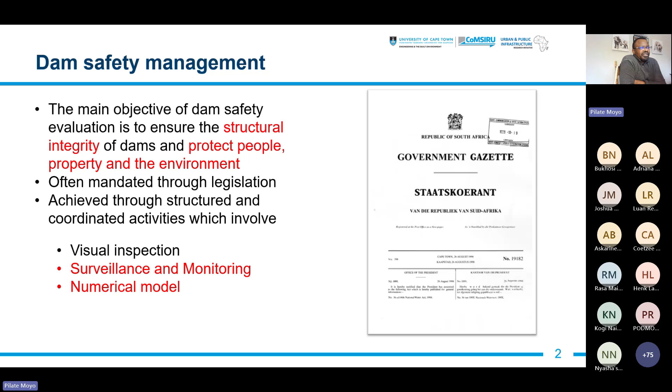But I'll focus more on the technical side this afternoon of dam safety evaluations, which really take three main activities: visual inspection, surveillance and monitoring, and numerical modeling. Through these activities, the intention is to gain as much information in order to make decisions about the condition of the dam or a reservoir. And once we get that state of health of the dam, then we can obviously make a decision as to what is the next step.

The best case scenario would be, after doing your visual inspections and after looking at your monitoring data and your model, to have a perfect match between what you have modeled or assessed and the actual structure. And of course, we know this is not possible. There's always going to be a misalignment, and the essence is to minimize that misalignment as much as possible as one goes through the assessment phase of a dam.

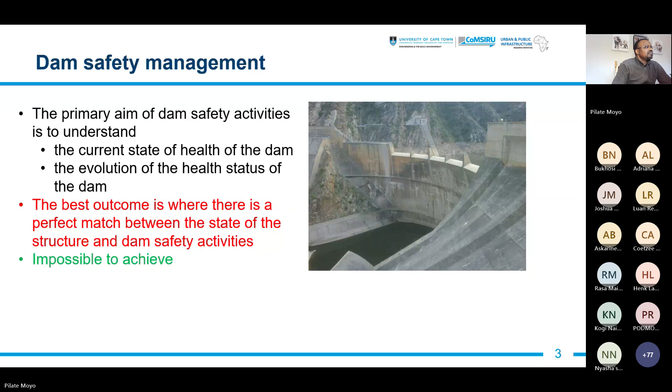One of the biggest challenges with dams is the many issues that interact around these structures. We know dams are very complex structures. They present challenges throughout the activities of dam safety evaluation, from inspections to numerical modeling. There are significant challenges, most of which arise from the complex geometry of the structures. We can design them as symmetrical, but they will never be perfectly symmetrical. The foundations will often offer challenges, as will the dam wall itself and the environment in which the structure is placed. As engineers, we have to put all of these together to come up with a meaningful solution or interpretation of what is going on with the structure.

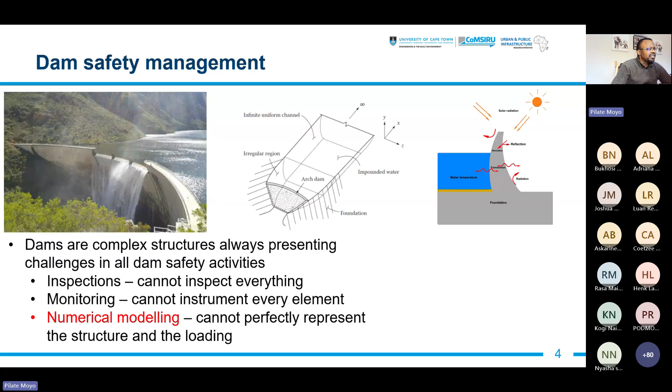Noting that misalignment will lead to difficult or inaccurate decisions. If I was to inspect a dam, it's unlikely that I will see everything on that dam. Neither can I monitor every piece of that dam, nor can the numerical model that I create be a perfect match to the dam. So my intention as a dam safety evaluator would be to minimize the difference between what is in my head from my inspections, what I see from the data coming out of the instruments, and what I see in my model. I try to minimize that and bring it as close as possible to the actual structural system, or to the actual structure as it stands.

So I want to focus quite a bit on the numerical modeling, because this is where ambient vibration testing plays a role. We'll look at the process of modeling and what the key limiting factors are.

I'm showing this picture, which you'll see quite a bit of today - one of the dams in the Western Cape. Given a dam like this, with the intention of assessing and evaluating its condition numerically, one wants to create a model, whether it's a finite element model or a simple structural model, that mimics this structure as closely as possible. So I want what's out there on the ground to behave as close as possible to what's in my computer.

To do this, one draws a lot from existing information through visual inspections. You spend time investigating or looking at the structure, or from data that you collect from monitoring instrumentation, geodetic measurements, crack gauges, and so on. You bring all of this information to inform the model that you build in your computer.

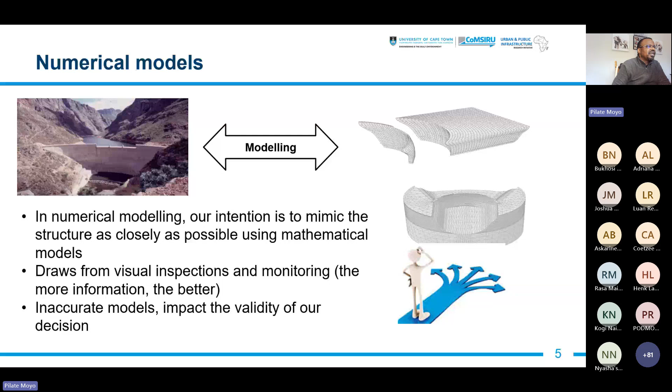Noting that the more there's a discrepancy between the structure and the model in the computer, the more you are getting inaccurate conclusions, which may have an impact in the decisions that you make. So our intention really is to bring this as close as possible, whichever approach we take. At the end, if we can bring the actual structure as close as possible to what's in my computer, then I can make significant or appropriate judgment about the structure. So how do we normally do this?

We would look at available information, build the models, and try to calibrate or validate using as much information as possible, largely static type data, geodetic measurements. We could even bring in temperature effects, or the varying water levels, which may change from time to time. The question is, is this adequate to capture the complex behavior of dams?

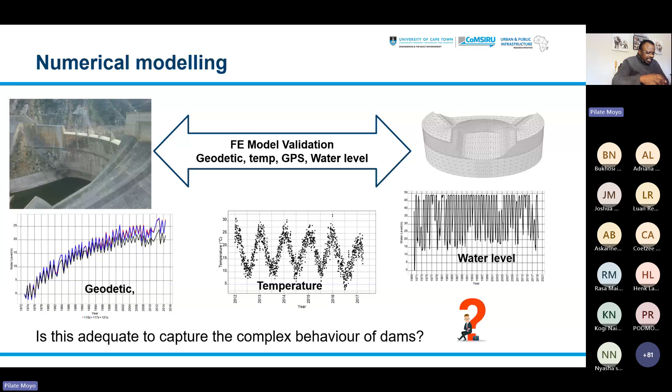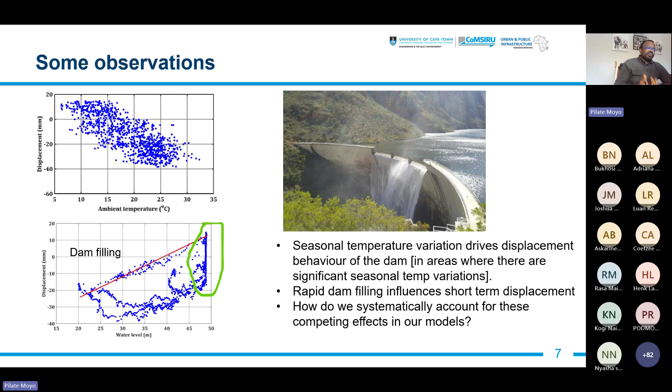So this is one of the things that led us to start thinking differently about how to develop models that speak to the structure as it stands.

So the idea of vibration testing is well known and it's been in existence for a long time. And it's been used for linking models to finite elements via certain dynamic properties such as natural frequencies, mode shapes, and damping ratios. Why is this such a useful property? Is that the mass, the damping, and the stiffness are inherent properties of a structure, so they won't change.

They act as a signature to the structure. So if I can find these properties today, they should be repeatable. I should find the same properties over time unless something has happened to the structure, some damage has been introduced.

We also observe for dams that there's a little bit of a complexity. That is, the water level keeps changing, so we have this phenomenon of added mass that we have to account for when we are modeling these structures.

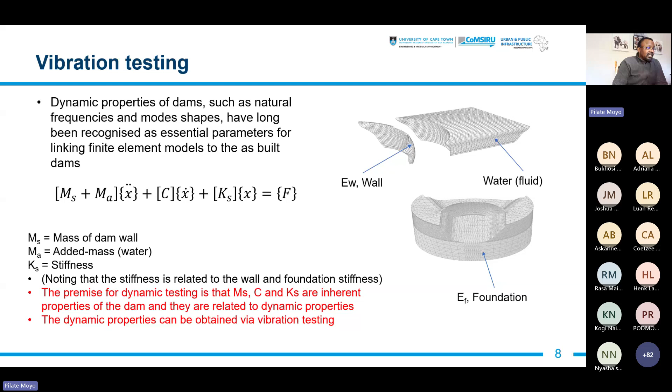So generally, the premise for dynamic testing is that the mass, the stiffness, and the damping are inherent to the structure, but these are also linked to the dynamic properties such as mode shapes and natural frequencies. And how do these mode shapes and natural frequencies look like?

This is a typical mode shape for a dam, almost displacement type behavior, but these are linked to vibration modes.

So the beauty of this is that you have the theoretical model, which is the meshed dynamic model, and you can measure this on site and reproduce the same properties from the actual structure.

In a similar way, you can also measure the natural frequencies and you can connect them to the stiffness of the structure. And if we can achieve this, then we probably have now an opportunity to access the true behavior of the structure in terms of its stiffness.

And one of the good things about looking at this combination of mode shapes and natural frequencies is that the mode shape will give you a good sense of the distribution of the stiffness in the structure. And the natural frequency, of course, gives you the magnitude or the values of the stiffness.

We know, of course, that the stiffness, which I have represented there as Kn, is connected to E, or the Young's modulus of the system. And in our case here, the mass Mn keeps changing according to the water level.

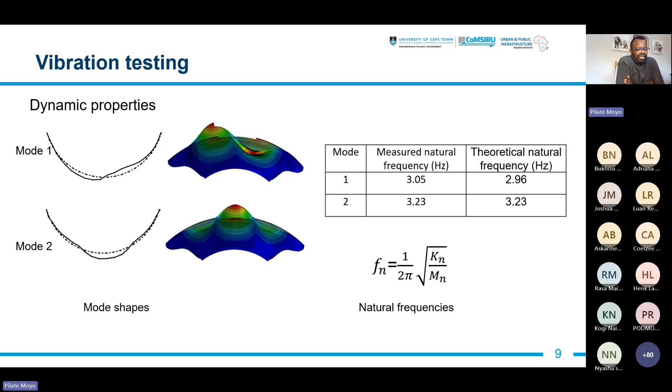The damping ratio is a separate property of the structure, which gives a sense of how the structure would dissipate energy under dynamic load. We often look for this one in the case of seismic loading.

So vibration testing comes in two main forms. One is so-called forced vibration testing, where we actually apply an excitation to the structure. Generally for dams, this means very heavy equipment that has to be put on the dam wall, and you have to have lots of power supply to actually get the dam going.

The main idea here is that you measure the force that you induce on the structure, and you are able to derive or obtain the frequency response functions directly. If one can do it, it gives you a very good result. However, it's very expensive, and preparation alone takes a long time. The tests don't take long, but getting the equipment on site is not easy.

There is the other type of testing, which is ambient vibration testing. In this case, we are relying mainly on operational excitation, operational loads. It could be just water waves, wind, or generators - whatever gives the structure some excitation, we can use that.

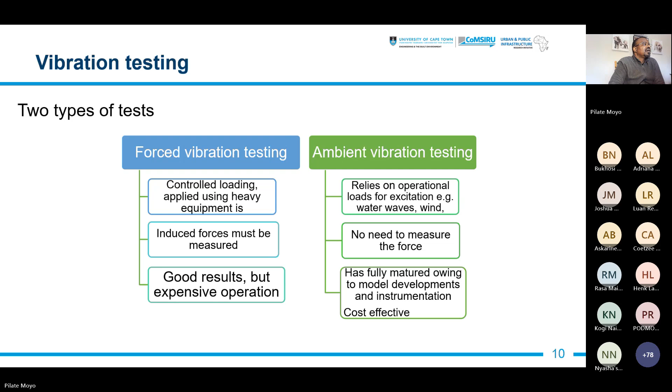So ambient vibration testing is therefore - I'm only talking about a device that I place on the structure, that's an accelerometer, I'll talk about these a little bit later - and a data acquisition system, in this case it could just be a PC, you leave it on site, you collect your information.

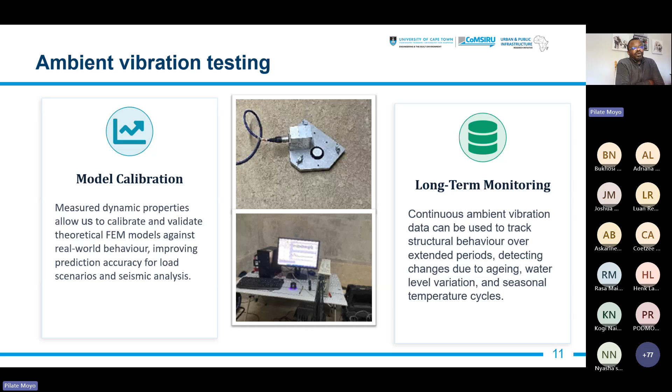Because of this, we can use ambient vibration for long-term monitoring of the structure. And because these dynamic properties are inherent, any change in the behavior of the dam will also result in change of the dynamic properties over time. So we can use this the same way we use displacements for damage detection, for anomalous behavior, and so on. It's got this dual action of providing us information for calibration, as well as for long-term behavior of our structural systems.

So some observations from monitoring a dam here in the Western Cape over a period of time, monitoring the natural frequencies, comparing that to - particularly I'm interested here - I've zoomed in to the water level. So this is the first natural mode, shown in red, and the blue is the water level. If you recall, the first observation I made was around the displacement behavior of the dam, which is very much in sync with the thermal behavior or seasonal temperature changes in the dam.

This one is showing us that the dynamic behavior is very much in sync with the water level. You can see there's a very good correlation between natural frequency and the water level. We can also see that there is not much correlation between ambient temperature and the natural frequency, which means the ambient temperature is not affecting our natural frequencies that much. Doesn't mean there's no effect altogether, but the main driver is the water level.

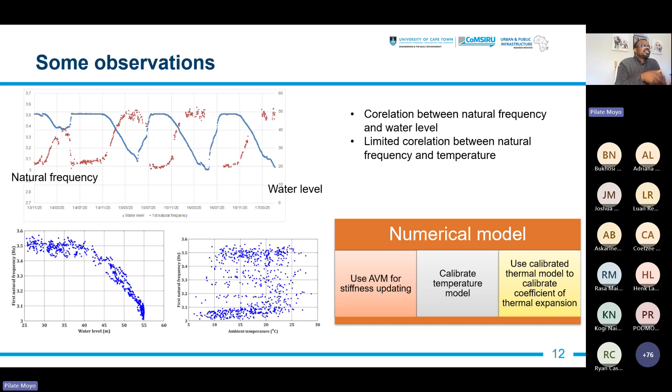This is where ambient vibration testing becomes a source of good information. How do we take advantage of this to calibrate and validate finite element models? How do we take a measurement using ambient vibration testing and combine it with temperature measurements to actually update and validate the structure? So how do we do that?

We have come up, over years, with an approach that takes a few steps, and I'm going to walk you through that approach now. This approach is a four-step approach: the first step is what I would call dynamic calibration, followed by thermal calibration, then displacement calibration, and then model validation.

In the observations I made, there were two key observations. One was the relationship between the natural frequencies and the water level, which links to ambient vibration, and seasonal displacements with temperature. So our first step is to deal with calibration of the stiffness, then calibration of temperature behavior, and then calibration of displacements.

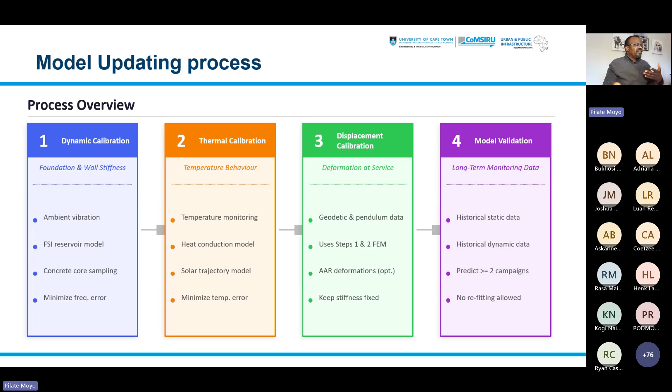Then we can validate this using any other data—once we've got a model, can we apply any other loading scenario and see if we get the same result? So how do we go about this?

The first step in ambient vibration calibration is to obtain ambient vibration measurements. We'll see a typical example of how we did that for Katse Dam. Once we've got that, we bring it to our finite element model and fine-tune it to get the stiffness of the foundation and the stiffness of the wall.

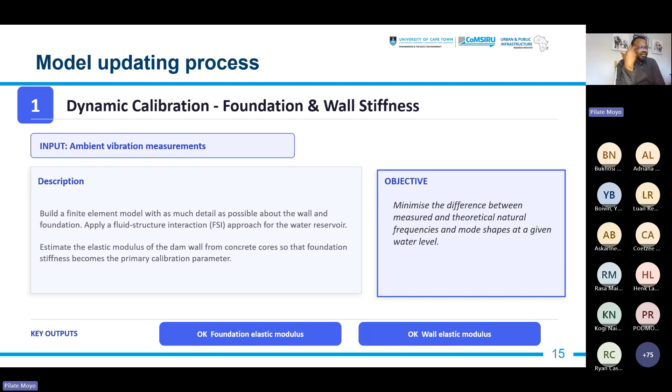What one advises is, as much as possible, to determine the elastic modulus of the dam wall independently, so you minimize uncertainties on the stiffnesses and only have to deal with uncertainty in the foundation modulus. At the end of this process, you have your elastic modulus for the foundation and for the concrete, and you don't want to change it afterward—it becomes your updated model.

The next step would be calibration of thermal behavior. Here we generally apply the normal standard heat conduction model. I'll highlight some things to observe in relation to temperature modeling—this step of thermal calibration is really about temperature behavior, so that I understand how temperature changes seasonally inside the dam wall.

Not many of our dams have thermocouples installed to tell you the internal temperature. But if one can get as much information as possible about the properties of the dam and its thermal conductivity, that's excellent, because it gives you the seasonal variation of temperature within the dam. And this is not the displacements, it is temperature behavior.

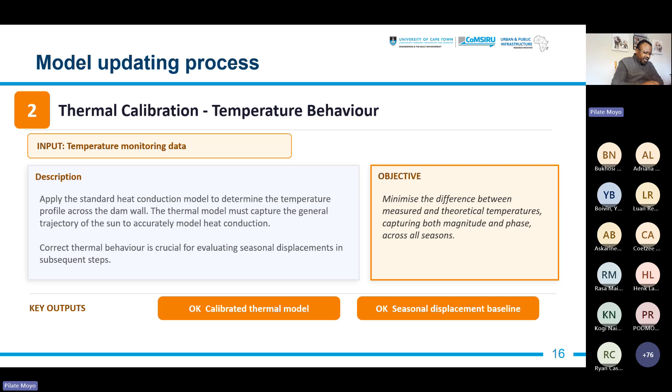We have to get this temperature behavior correct before we can estimate the seasonal temperatures. Once we convert those seasonal temperatures to seasonal displacements, we can compare these to the pendulum readings or geodetic readings to calibrate the coefficient of thermal expansion.

For dams that have AAR, one has to also incorporate the long-term induced deformations from AAR—I'll show you how that can be done. So the end of this process is to say: I have the correct expansion behavior from the temperature, and I've also got the correct deformation behavior from AAR if there is AAR.

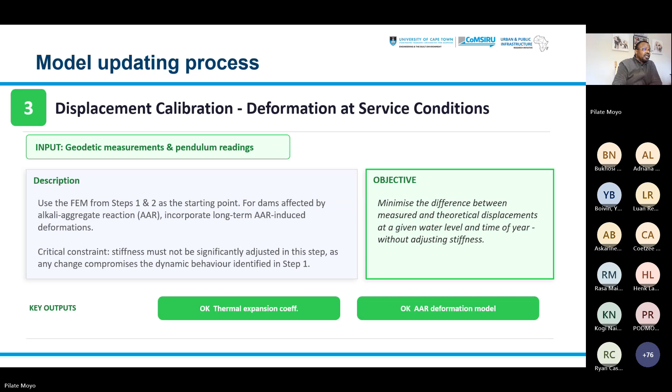Upon completion of these last three steps, one can then use historical information. If I took a measurement two years ago, I can take that scenario and apply the model to it. There must be agreement, and it's always very tricky doing this, but believe me, it works.

Once you get to that process, you'll see the numbers come together well. At the end of this, you have a validated FE model, and you're ready to do your assessment, which means now you can do your prognosis. You can apply any loading conditions, and so on.

A few things to note: modeling of the foundation really requires a good understanding of the site, and it's not going to be a uniform foundation throughout. You'll probably have more than 2 or 3 areas of different stiffnesses, so the stiffness is not just a single number. It would be a series of values indicating the stiffness variation in the foundation, and the mode shapes really help us get to that stiffness distribution.

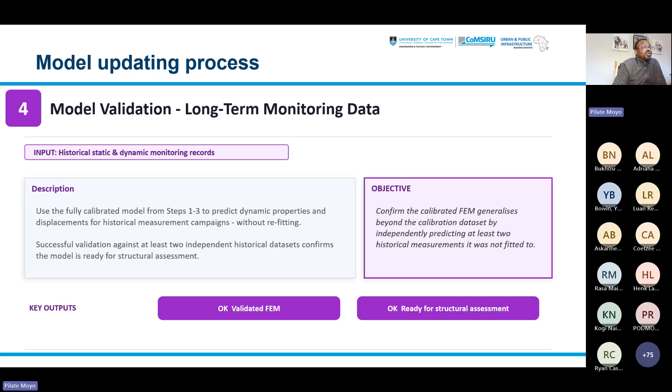A few things to consider: in the thermal analysis, we apply the standard heat conduction models, but to get reasonable results, one has to account for solar radiation and irradiation, and this you can only do by understanding the position of the sun. We try as much as possible to incorporate that position of the sun on the dam during the day, during the month, and seasonal variation of the position of the sun. It sounds complicated, but it's not.

One also has to obviously do a steady state analysis before you conduct your transient analysis. So temperature analysis would require that one goes through this process. It's not just applying a temperature on the upstream and a temperature on the downstream—it has to follow the seasonal variation of the temperatures across that dam wall.

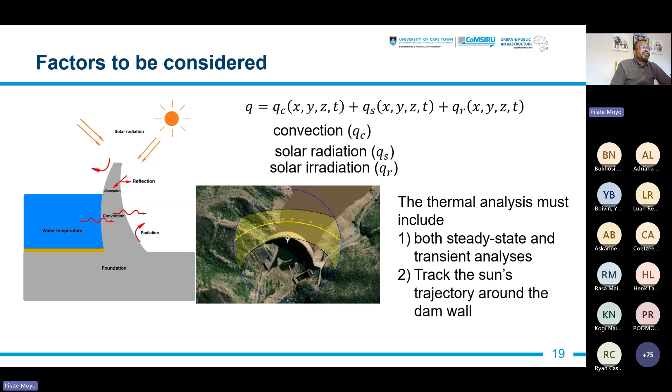And of course, one of the challenges is the reservoir temperature—what the temperature of the water is. I think it's one area that we still need to do quite a few studies on, to understand the true profile of water temperatures in the dam.

The other factor to consider is the mass of the wall and the added mass, which is the reservoir or the water. In the modeling process, what we found is that the Westergaard method tends to overestimate the added mass by a significant amount, sometimes 20 to 25%. We find that the fluid structure interaction approach, where you model the reservoir using fluid elements, depending on which software you're using, converges quite quicker compared to the Westergaard method, and generally gives results closer to what we've measured.

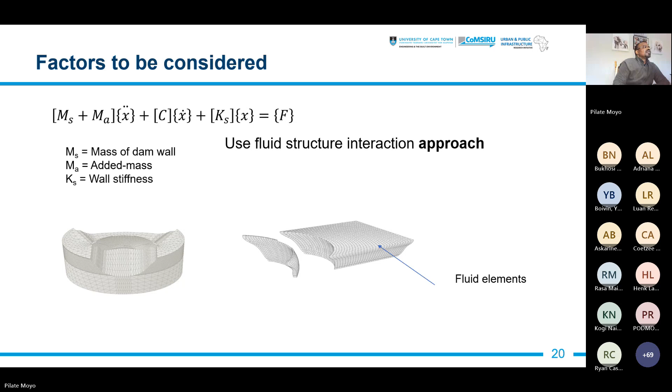If you are going to deal with ASR, this is the approach we have taken. It's not the only approach, but depending on the information available on the chemomechanical behavior of your concrete, this gives much more realistic results. But like any other of these long-term projections, over a long period of time, which is what ASR does, the displacements may not be as accurate. So one would need to constantly update these. If you project for 15 years, you'll be fine, but after 15 years, you need to go back and measure and see, am I still on the curve? Otherwise, there are inaccuracies inherent in this method, like any other of these ASR-related approaches.

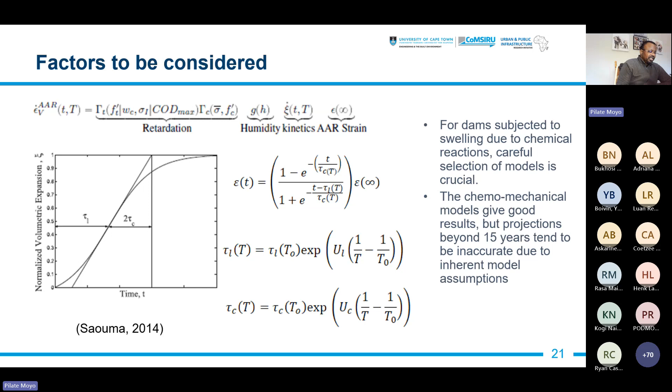So this is a very brief introduction to this subject, and I thought I must share something here—let me walk you through this very briefly.

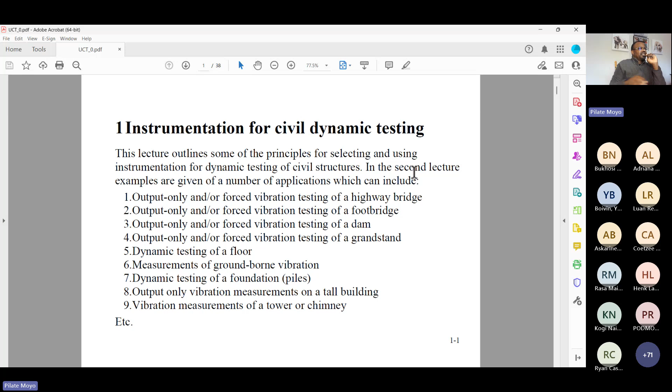The success of ambient vibration testing itself is largely dependent on what instrumentation you use, and there's a huge range of these instruments. For our space, we have the vibration sensors—those take the information from the dam wall and respond to the measurement. If I'm going to shake it, we've got to apply an excitation; we use what we call a shaker or hammer.

At this stage, we have relied a lot on wired systems because we are measuring very low level vibration, so we prefer to use wired systems. Hopefully the wireless systems are getting better—I haven't used them at this stage.

For the work that we do, we really want to get the best results, and the data acquisition system is such a crucial element of this. The choice of your vibration sensor, the cabling you use, and the data acquisition system is the most crucial element, because that gives you the level of vibration you can measure, the amount of noise introduced into your system, and the length of cable you can use. The system we've chosen can measure down to a micro G, but practically one can say maybe 5 micro G.

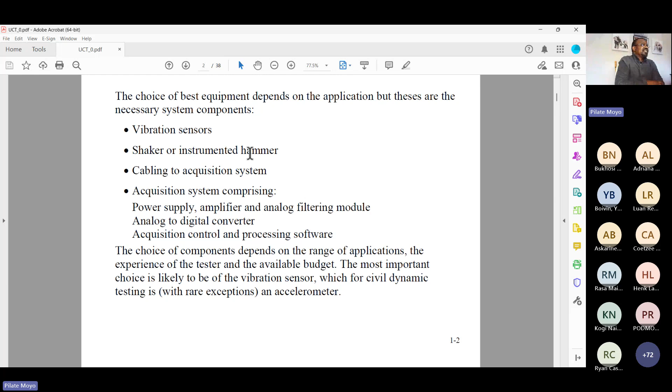The cables we use can go up to 200, 300, 400, 500 meters on a single cable. We use this Honeywell accelerometer, which is the so-called force balance type, meaning they're current driven. That means you can have a very long cable without introducing noise. Voltage driven, you always have quite a bit of noise.

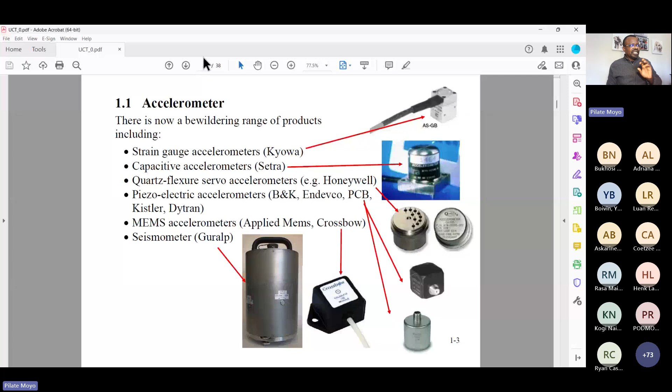There is a bewildering choice of these accelerometers and devices, so one has to be very careful which one you choose, because they may not actually pick up the level of vibration you want, especially under ambient conditions. If it's forced vibration, maybe it will be good, but under ambient vibration you want something that has good resolution and is current driven, I would say.

Once you get to these current driven accelerometers, you're really talking quite a lot of money. They tend to be quite expensive, but in the long run, if you're working in this space, I think you get good value back for your money.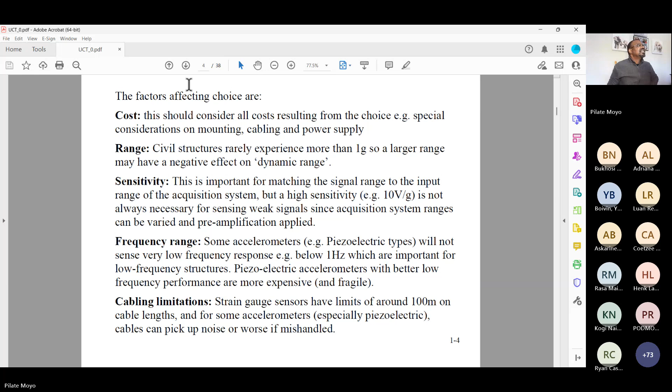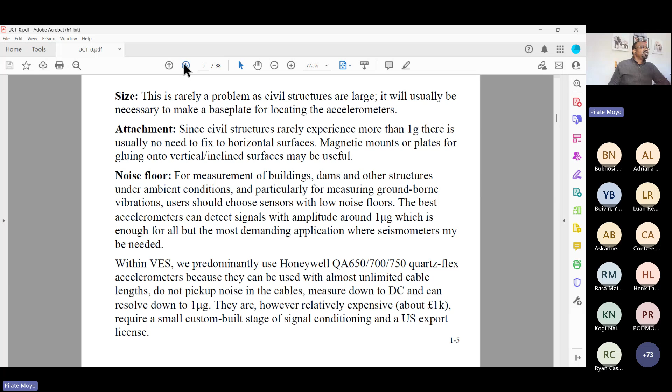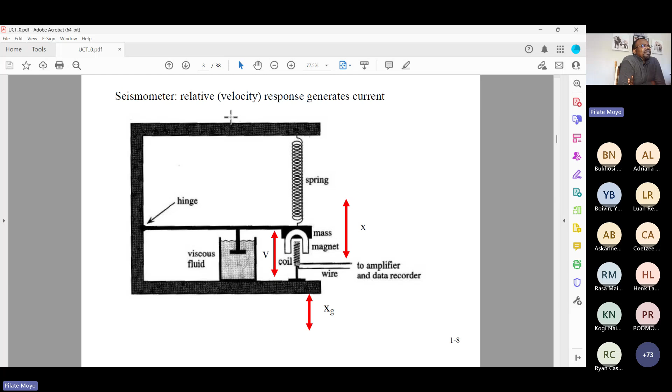I spoke about the noise floor. For our accelerometers, we go down to about 1 micro G of acceleration. This is what we teach sometimes when explaining how accelerometers actually work, but I'll skip that one.

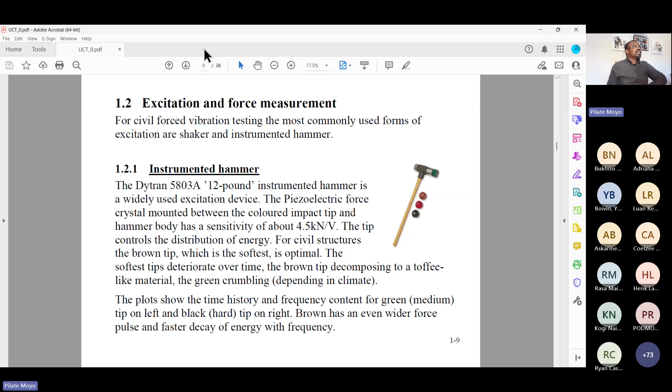The excitation systems: if you're going to do forced vibration testing, there are a number of approaches. One is the instrumented hammer, used to introduce excitation to your structure. It gives about 4 kilonewtons of force and gets your structure moving - you can move a dam with this one. We use it for floors, bridges, and building structures. They work fine.

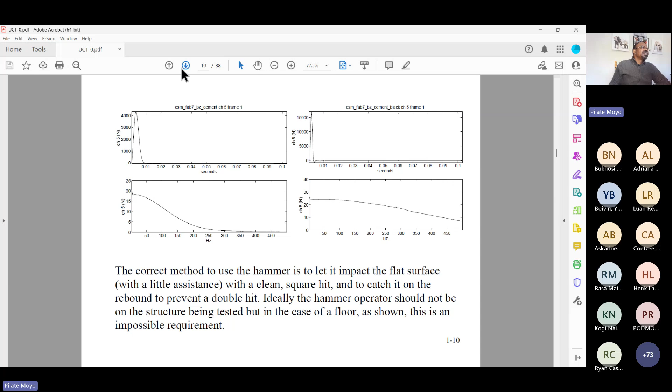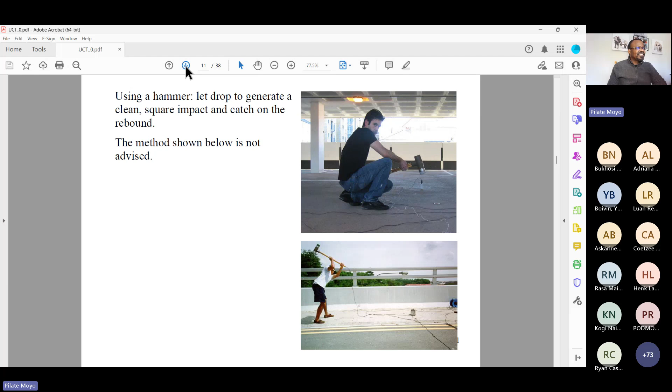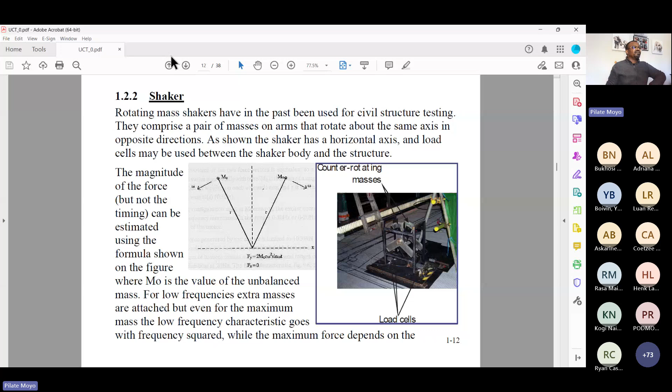This is a shaker. These are used, not in this size, but in the typical structural system to excite large structures. You mount this on the structure and connect it to a power supply, and it starts moving back and forth, introducing excitation to your structure.

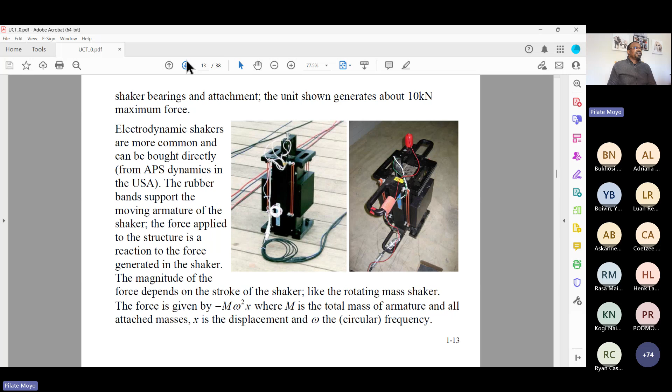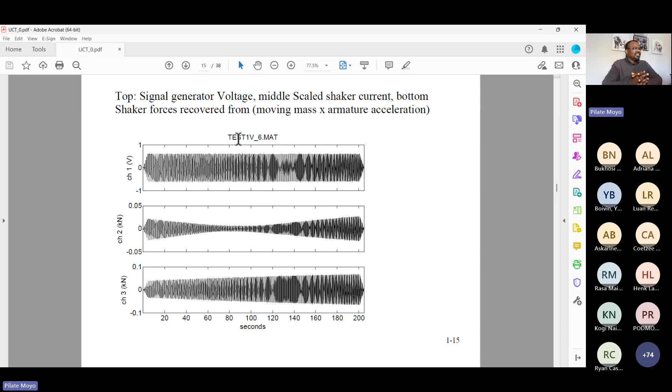And what comes out of it, of course, are these measurements. What we do on site, as you'll see in the next presentation, is that out of about 2 hours of measurement, we spend maybe another hour or more ensuring that what we're measuring makes sense. That's really the big deal - it's a big deal to understand that what is coming out of my device makes sense.

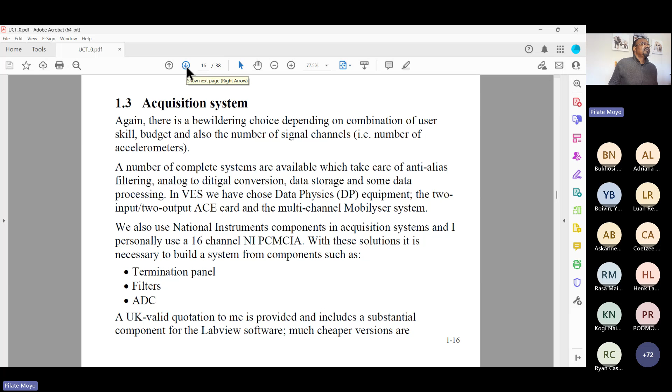The next most important element of ambient vibration testing is the acquisition system - what do you use to collect the information? So I've got my accelerometer, and for ambient vibration testing I don't need the excitation stuff, but now I need to buy the thing that will read the accelerometer. That's the data acquisition system.

Again, there's a wide range of these, but the important things are: how many measurements do I want to take at a given time? What's the size of this thing? Can I power it on site, or does it need extra power? And more importantly, how many bits - how many bits can I measure? The higher this number, the better.

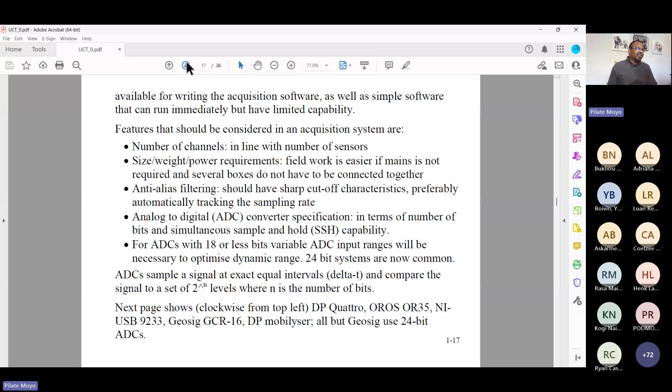The standard now is 24 bits. If you're using less than 24 bits, it's not going to work for your ambient vibration testing - it's going to be a challenge. There's also quite a range of these and of suppliers. One has to make sure the sensitivity and the lowest voltage I can detect on this matches the lowest vibration I need to measure.

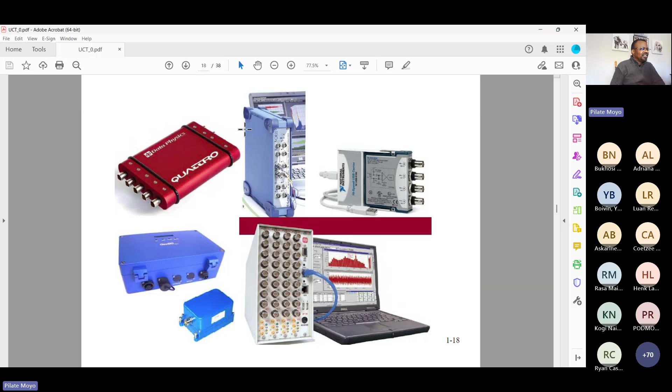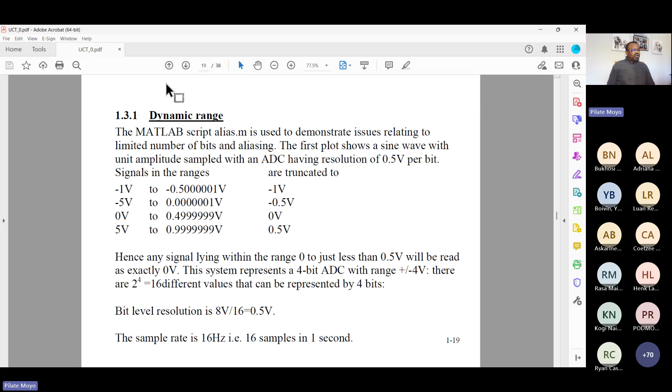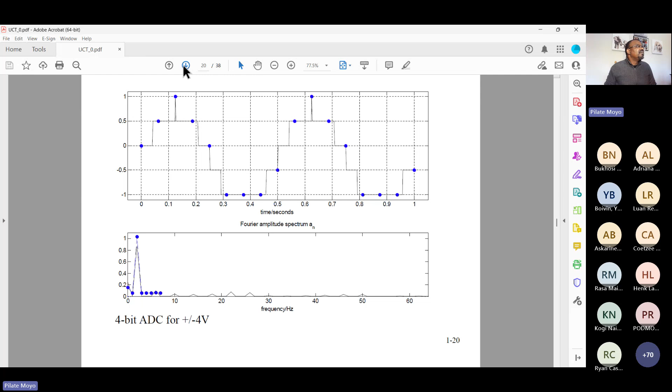So you get a range of these, and one has to be very careful how we choose them. The dynamic range is generally also important - once you've got the correct bits, it's not your problem. This is what a bit does: you see it's not a smooth measurement, it's rugged, it's got these steps. If I've got the correct bit, then you get a smooth measurement. So with ambient vibration testing, again, one has to be careful what we choose for this.

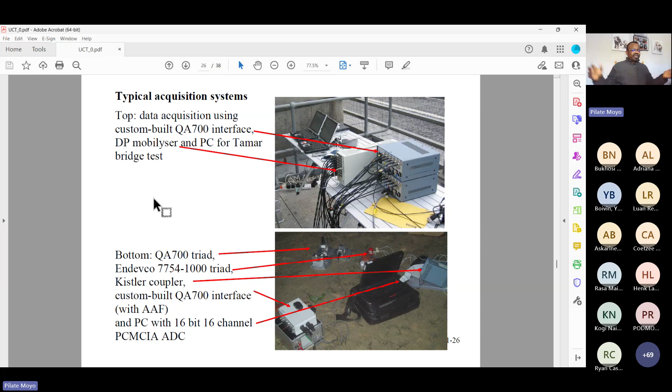Data quality is absolutely crucial because the data comes raw in this way, and one has to be sure that what they're showing, or what they are measuring, makes sense before you leave the site and before you actually commit to taking the measurements.

So I would like to end it here now on the basics of ambient vibration testing. I have introduced the idea of how we combine other techniques, monitoring with ambient vibration testing for model updating, and the sort of instrumentation that one needs to achieve a good ambient vibration setup. Now I'll hand over to Dr. Nyoni to walk us through a typical test and the results of that test.

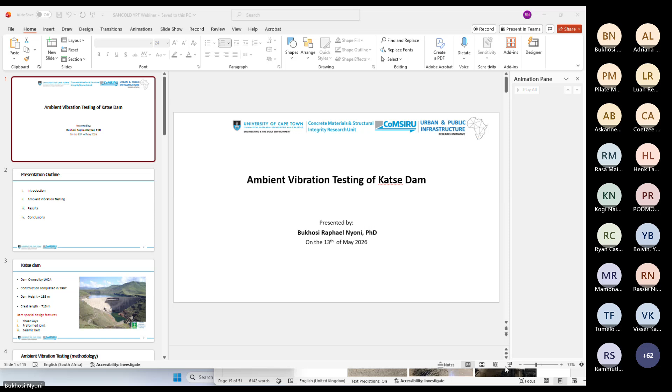So I will be walking you through typical ambient vibration testing of a dam. In this case, it was Katse Dam. So what I'll be presenting: a brief introduction of the dam and the relevant information to ambient vibration testing, then look at ambient vibration testing, the steps we followed in conducting the test, and look at a few results and some conclusions.

The Katse Dam is owned by the LHDA, the Lesotho Highlands Development Authority. It was constructed in 1997 and has a height of 185 meters and a crest length of 710 meters. Some key features of the dam are shear keys, preformed joint, and seismic belt.

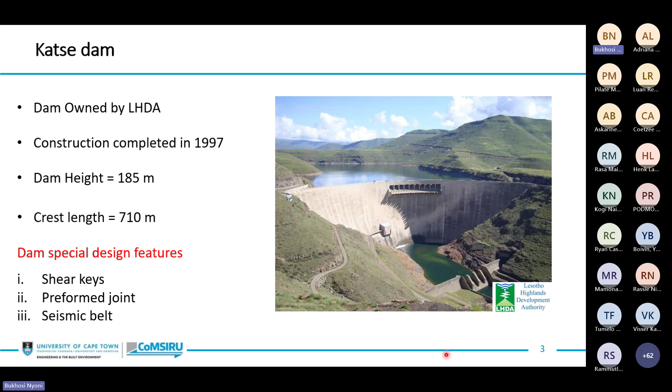We conducted ambient vibration tests, and the objectives of the test were to determine the dynamic properties of the dam in light of the long-term monitoring of the dam, to assess if the seismic belt affects the dynamic behavior of the dam through the ambient vibration test, and to assess the response of the structure at foundation level.

So the ambient vibration testing steps we followed were as follows. First, before we could carry out the test, we needed to get a sense of the mode shapes and the first natural frequency to expect based on the water level of the dam.

Second, we then conducted preliminary ambient vibration measurements through an initial site visit to assess if it would be feasible to carry out the tests. Once we determined that it was feasible to carry out a full-scale test, we carried out a full-scale ambient vibration test.

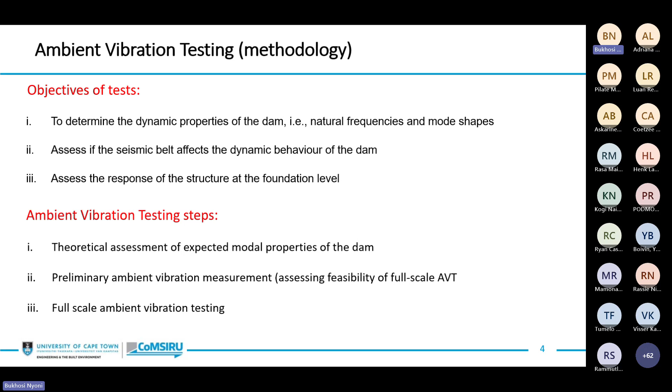In the theoretical assessment of the dam, we used two approaches for the natural frequency, shown as equation 1 and equation 2. From the first approach, the first natural frequency for the water level for a full dam case was 2.13 hertz, and the second approach gave us a first natural frequency of 2.05 hertz.

If you have a model, you can run a dynamic analysis to obtain or observe the mode shape sequence, looking at which mode shape comes first. In this case, for Katse, it was antisymmetric as the first mode shape, and this would be the first symmetric mode shape. As the mode shape numbers increase, you still get symmetric shapes, but the number of troughs increases as the mode number increases.

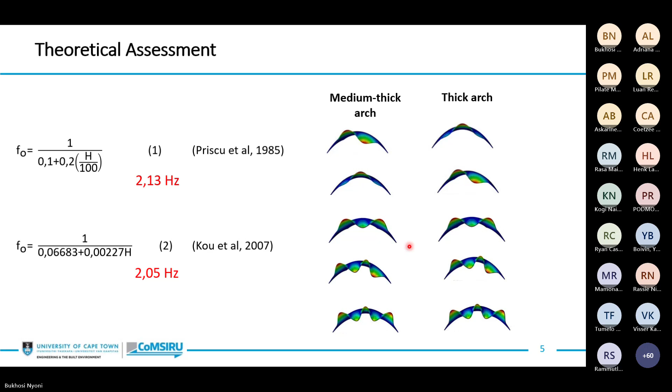So for our initial next step, after getting the adjusted theoretical and initial estimate of the natural frequency and the mode shape sequence, we undertook an initial site visit to verify access, safety, and to conduct preliminary measurements. Access on site, conditions, and safety requirements were assessed, and we also conducted a preliminary measurement in Gallery A.

We set up on blocks 5, 17, and 19. The equipment we used was 3 force balance accelerometers with a nominal sensitivity of 8.8 volts per G, a portable 24-bit National Instruments dynamic signal analyzer, and our laptop that we carried along.

What I show here on the right is an auto power spectra from the measurements. We see the first 2 or 3 mode shapes because we didn't run the test for a long period, so we only picked the first 3 modes.

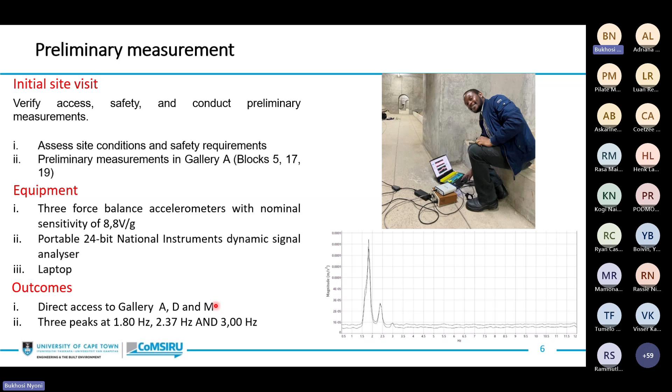For the full ambient vibration test, we used 22 force balanced accelerometers with the same sensitivity. In this case, we had a 24-channel purpose-made power supply and a 24-channel Data Physics signal analyzer, a desktop, and some cables.

The cabling had to be long in this case also because the dam has a very long crest. Our cabling got to about a kilometer in this case to be able to do the setup on the top gallery.

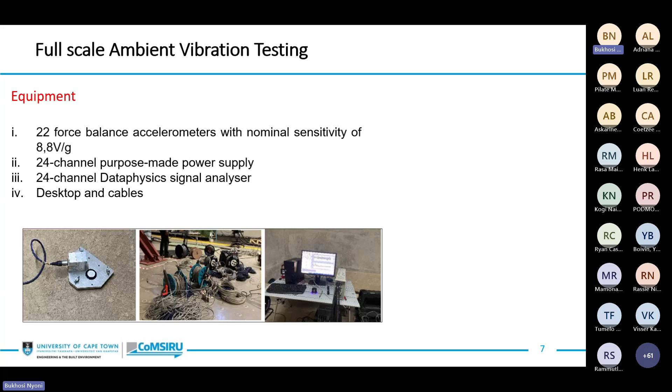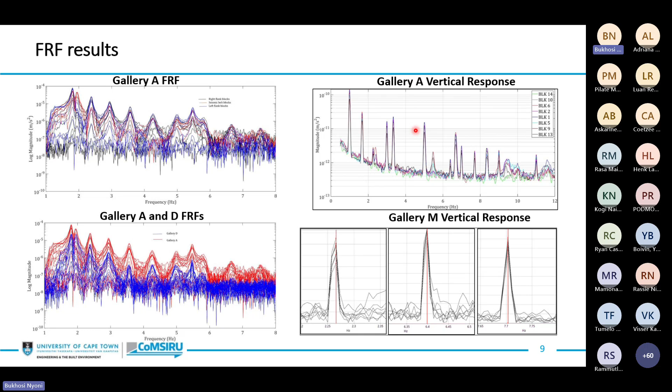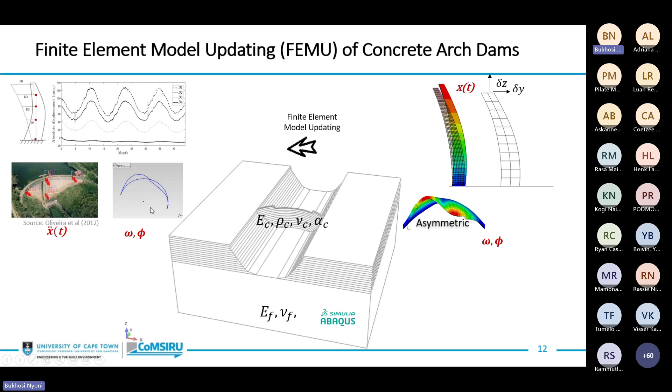So the usefulness of this data, as has been indicated, is that the natural frequencies are used in the updating process. Here I just show a typical case including the displacements of the dam, but you typically use these results in updating an FEM model.

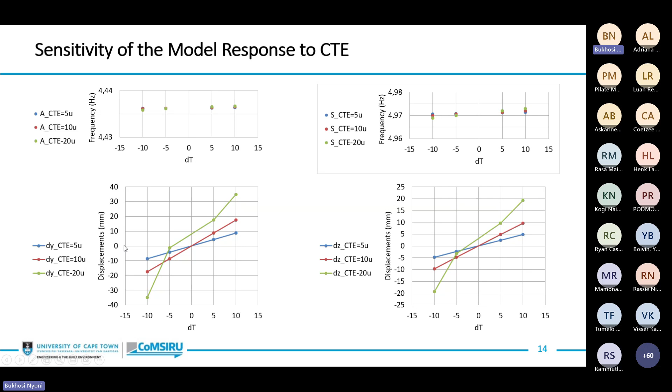However, if you look at the coefficient of thermal expansion, the sensitivity of the dynamic response is very small, but the displacement response is quite high compared to the dynamic response. So based on this, the ambient vibration tests therefore are used in updating your system stiffness.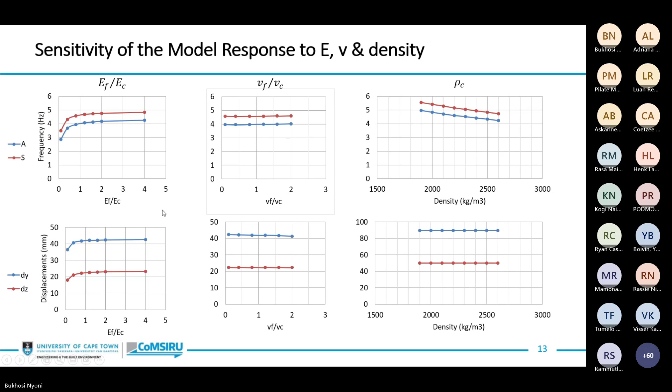So just some concluding remarks. Nine mode shapes were identified for Katse Dam, and the identified mode shapes show good agreement with the expected theoretical modes of a medium thick arch dam with a U-shaped valley.

The second conclusion is that there is no identifiable influence of the seismic belt, which was part of the objectives of this test, on the radial mode shapes of the dam.

So based on the modes, gallery A and D exhibit the same mode shapes. And then we also conclude that the vertical modes of vibration identified in gallery A are consistent with the modes identified in gallery M. The measured response of the dam at foundation level did not indicate any dam structural modes.

This indicates that the stiffness of the foundation material is approximately equal or greater than the stiffness of the dam. And lastly, based on the mode shapes, the right flank appears to be stiffer than the left, which would be important when you are updating or calibrating a model using the modal parameters from ambient vibration testing.

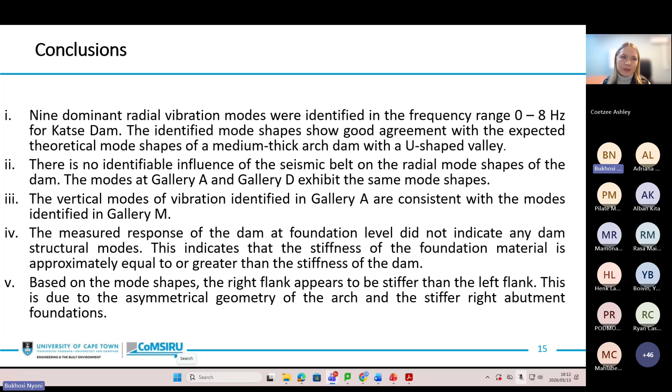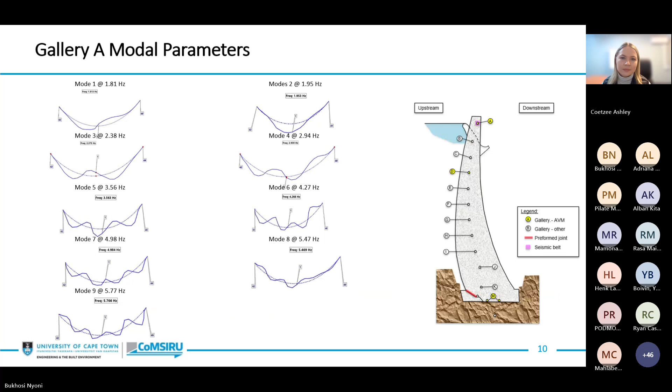So he's asking, would you expect a different response, in other words structural modes at foundation level, even with differences between foundation and dam stiffness? Giovanni, if I'm not reading the question correctly, you can just raise your hand and then we can open for discussion. I think I understand the question.

So I would expect a difference in the behavior, particularly the mode shape. I've seen in the studies that I've done that the stiffness - if the system stiffness varies, it also affects the mode shapes. So as an example, if you compare, let's say if you fix your boundary condition between the foundation and the wall, sometimes depending on how low your values are, you might get a change in the sequence of the natural frequency. So the stiffness does affect the modal parameters, not just in terms of the natural frequency, but also in terms of the mode shapes.

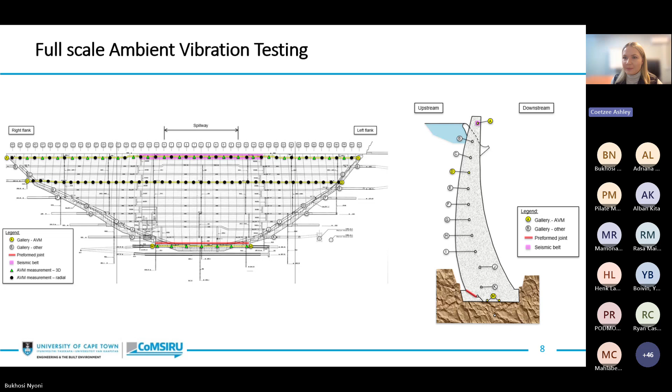Right, once again...